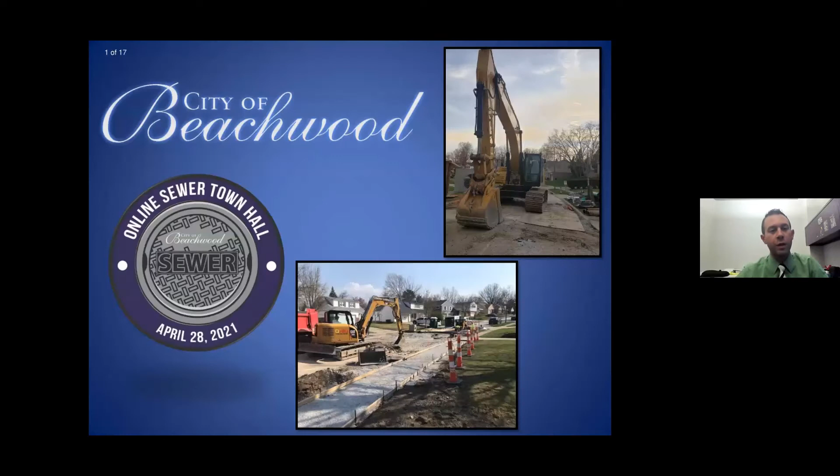As the mayor talked about, we're going to have an introduction into the sewer system and what the city, the county, and the sewer district has done, and talk about what the future is going to hold. So here we actually have some pictures from our recent project that was completed on Glen Hill. There's a storm sewer project, which we'll talk about here in a little bit.

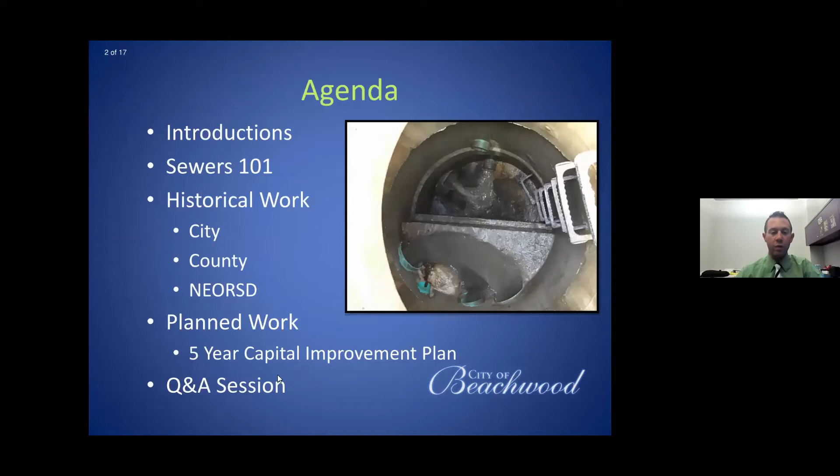Here's the agenda for tonight. We went over some of the introductions, Sewers 101, the historical work that the city, the county, and the sewer district has done, and then the 5-year capital improvement plan. And then, like you said, we'll have a question and answer session.

So Sewers 101, I want to talk about the responsibilities of the sewer system. On the back of the sidewalk is what's known as the right-of-way line or the property line. From the back of the sidewalk to the street is public infrastructure, and from the back of the sidewalk to the house is the private side. So there are storm sewers and sanitary sewers that the city maintains. The catch basins will go to the storm sewer, and any of the rainwater from your gutters, downspouts, and foundation drains go through your storm lateral and tie into the public storm sewer.

On the sanitary side, you have wastewater from your bathtubs, toilets, sinks, that will go through the sanitary lateral into the public sanitary sewer system. There are test tees that are located within the yard, which are used for cleaning operations and also televising your laterals.

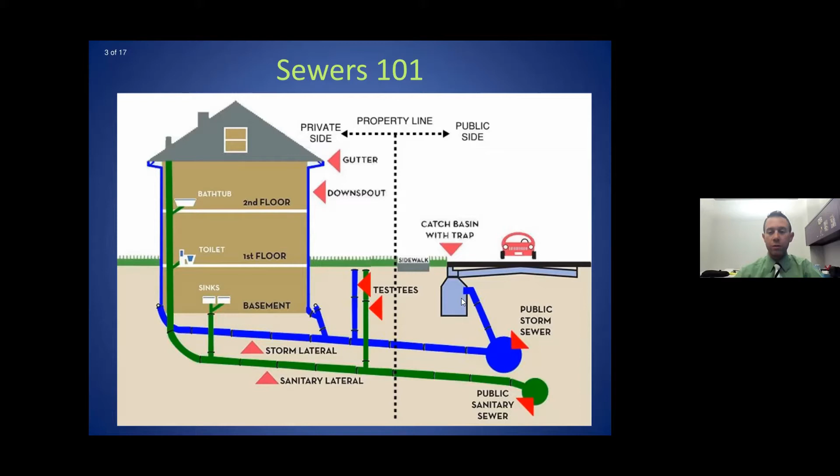What happens for flooding issues is that in a properly connected system, you can see that the roof, the foundation drain, and the catch basin are all connected to the storm sewer, and then you have the sanitary lateral connected to the sanitary system. When you have inflow and infiltration, otherwise known as I&I, you have cross-connected foundation drains, you have uncapped cleanouts, so surface water can get into those test tee cleanouts. You could have broken sewer laterals. You could have root intrusion from trees that get into the joints.

You could have storm cross connections if a catch basin is improperly connected to the sanitary sewer instead of the storm sewer. You could have cracks in the manholes, cracks in the mainline pipe as well. When this happens, and there's an influx of stormwater that gets into the sanitary system, that's what causes the basement flooding. And specifically on the private side, a lot of testing is being done to show where the downspouts are illicitly connected to the sanitary lateral, or if there are issues with the laterals that show there's broken connections.

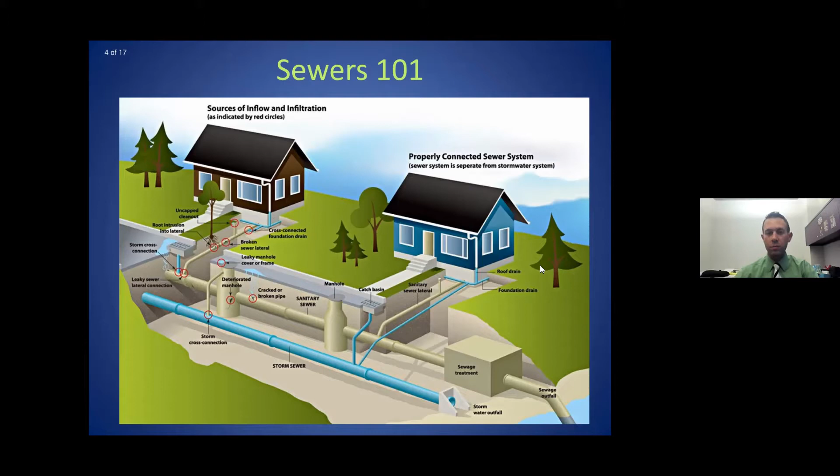As you can see here with the sewer system, the elevation of the house and the basement make a major factor into how the basement can flood and what level of rain event is needed for the flooding to happen. You have a house that sits much higher than an adjacent house on a hilly road. Then when this sewer backs up, there's a much better chance that the sewage could go back up into the lateral into this house instead of this house.

In this case, backflow preventers are installed. They're installed right behind the clean out, and it has a flapper gate right here that essentially acts so that water can only go one way towards the street, so that when it does back up, the flapper gate closes and it prevents flooding of the basement.

So the Cuyahoga County Department of Public Works, they've installed 38 of these throughout different residences in the city of Beachwood over the last 5 years. But the city actually started their own contract last year and installed 49 of them. And Mr. Chris Arietta is going to talk a little bit more about backflow preventers.

Thank you, David. So I just wanted to take a moment before Dave continues on here on the presentation and just give a little more information about our backflow program. For the past several years, Beachwood has worked closely with the County Public Works Department to install backflow preventers in homes where multiple backups have occurred. And these have occurred where we've had a storm surcharge in our mains.

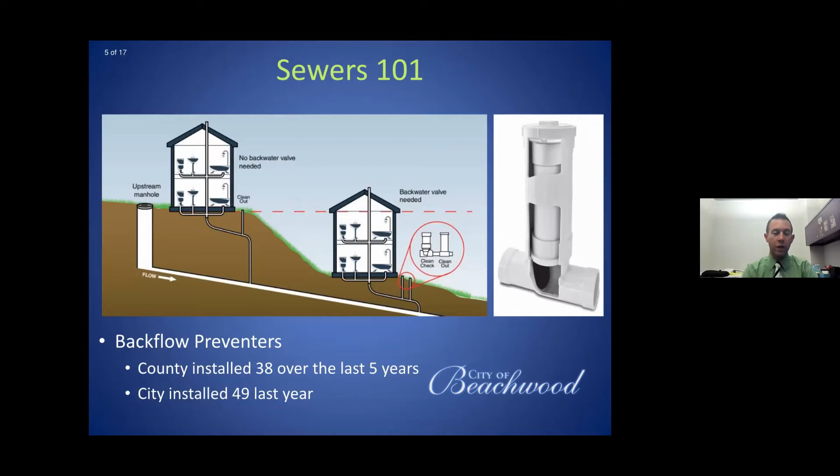And as the mayor talked about in his introduction, there was an increase in high intensity rain events. So in March of 2020, actually March 29th, we had what's known as a 5-year event. So it rained almost 1.5 inches in 1 hour. On July 11th, there was a 10-year event. So it's 2.79 inches over 6 hours. On August 3rd, we had a 2-year event, which is 1.33 inches in 1 hour.

And on Labor Day, the famous Labor Day event, it was actually almost a 25-year event. It rained 3.78 inches in 6 hours. That means that the frequency of that type of event should only happen once every that many years. So if it's a 25-year event, the probability of it happening based on all of the historical rainfall data, it should only be one every 25 years, one every 10 years, one every 50 years.

Beachwood, in 2020, had 58.75 total inches of rain. The Northeast Ohio Regional Sewer District has, I believe, 28 rain gauges in their entire network, and Beachwood's rain gauge was the second highest. So this is what a rain gauge looks like here. It's called the tipping bucket. So water comes in the top, and there's a little apparatus that once it fills up, it kind of tips over and it counts as a click. Each click is so many inches, and then it empties out the bottom.

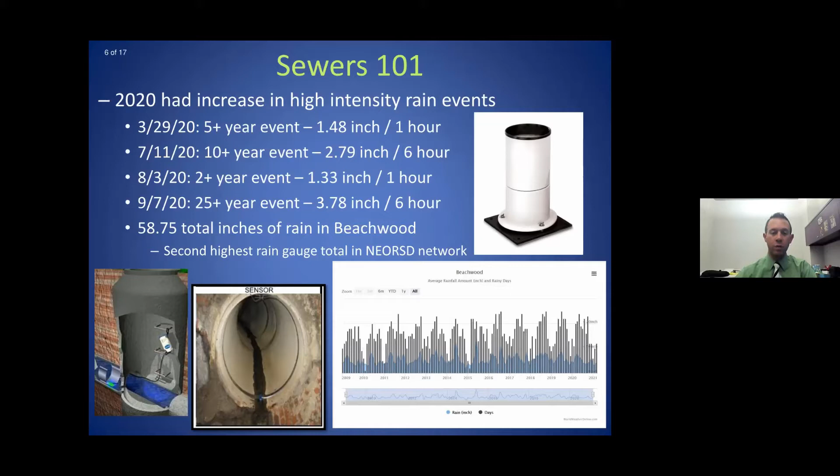It acts essentially based on the pressure that is pushed onto the sensor; it will tell you what the level of the water is in the pipe. So we use that to figure out where the problem areas are, and then also how to design in the future, what those improvements need to be.

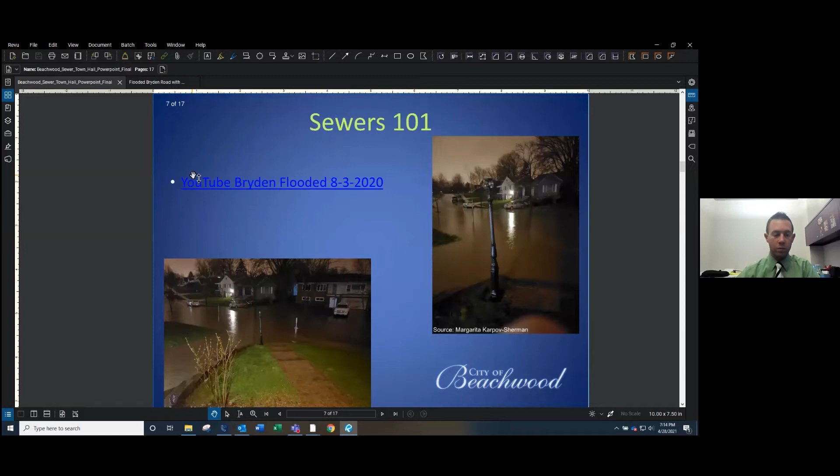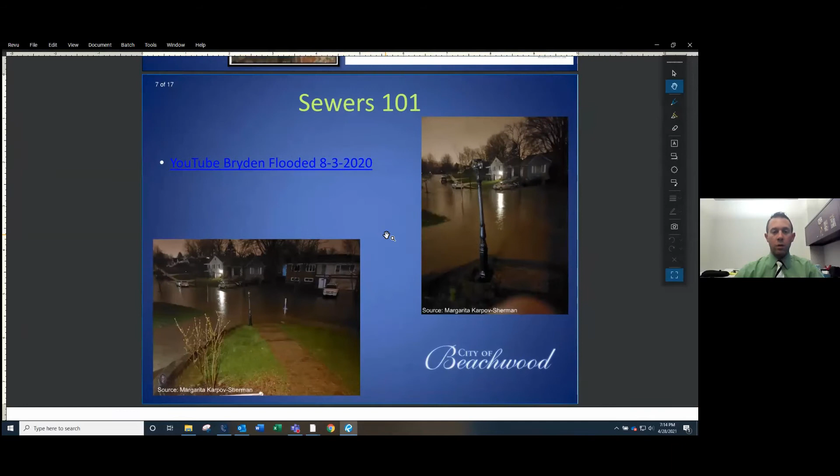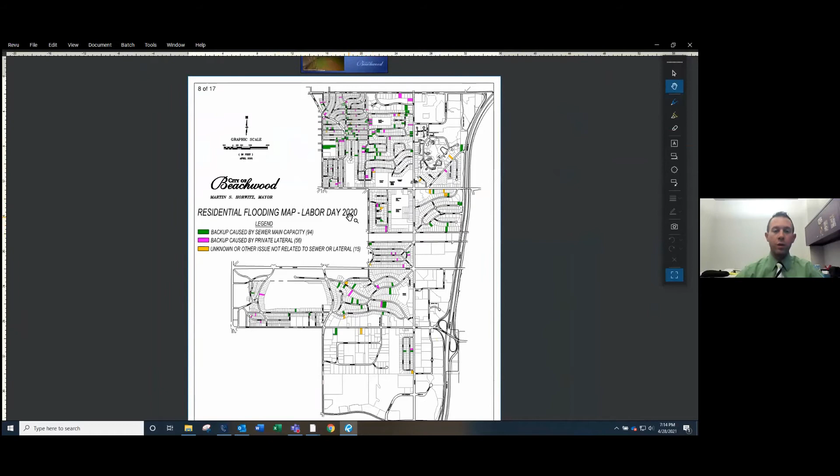So this is a map from Labor Day. All of these little squares or rectangles are parcels. They're the different properties. And so the city received 165 service calls from different residents. After they investigated it, the city and the county would go out to the residences, they TV the lateral, they TV the main, and they find what the problem was.

So in 94 of those cases, it was found that there was nothing wrong with the private homeowner's lateral, and it was more on the sewer main side in the street. There were 56 properties where they televised the lateral and the lateral was broken. The lateral had grease deposits, it had roots, other issues with that. And then there's 15 others not related to the sewer. So if your basement had bad waterproofing and it was leaking through the walls, that's not necessarily a sewer issue, but they still called the city just to talk about it.

So what this means is that there is an excess amount of stormwater, as we talked about before, those illicit connections, a lot of stormwater getting in from downspout connections into the sanitary lateral. And so it's not necessarily that the sanitary sewer capacity is undersized. It's just undersized for the amount of flow that's getting to it that shouldn't be getting to it. If you think about it, there's a standard gallons per day of what each person uses, and that's how the sewers are designed. So when you have that standard plus a 25-year rain event, you're going to have basement backups.

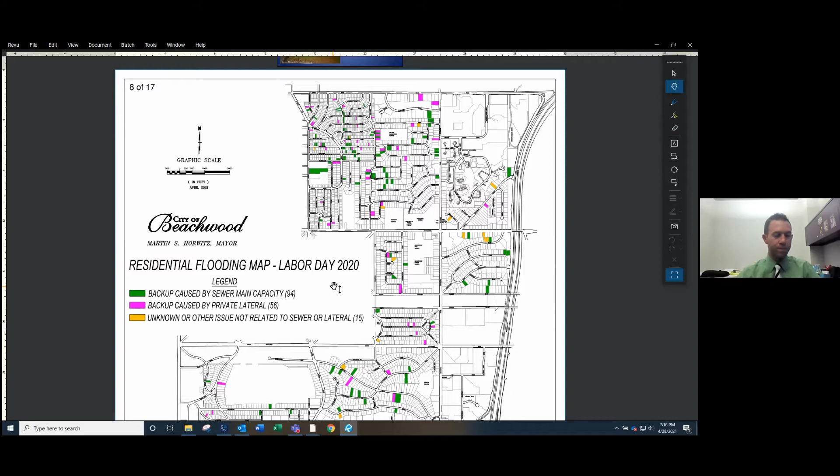So what's been going on work-wise? The Cuyahoga County Department of Public Works does work for the city of Beachwood, and there's tax dollars that go to them that they're using in the city. And in 2020, they had over 170,000 feet of sewer cleaning. That's both sanitary and storm sewers. It's about a 50-50 split.

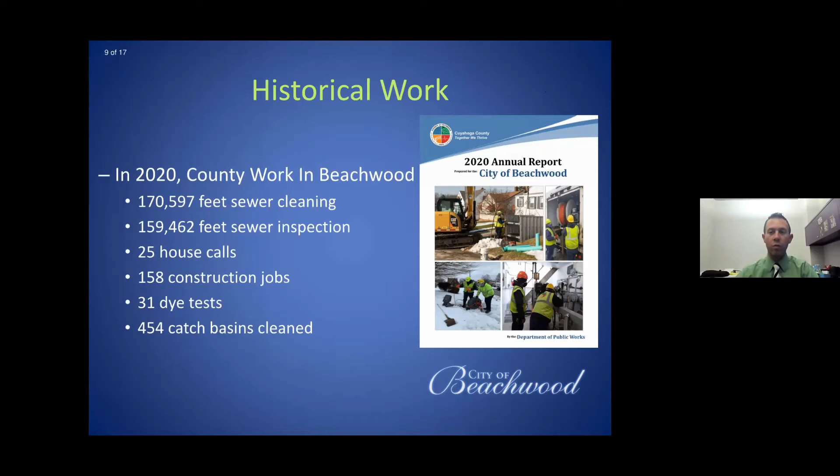They had 159,000 feet of sewer inspection. They did 25 house calls, 158 construction jobs, 31 dye tests, and 454 catch basins that were cleaned. This was above average compared to the previous 5 years when you look at the annual reports, which are available on the county's website.

So of those dollars that were spent, the maintenance of the sewer system was just over $844,000. Pump station operation and maintenance, $31,000. Engineering and/or inspection cost was $56,000, and capital expenses for different repairs that were being done were just over $84,000. For just over $1 million that the county spent of the Beachwood money from that tax base.

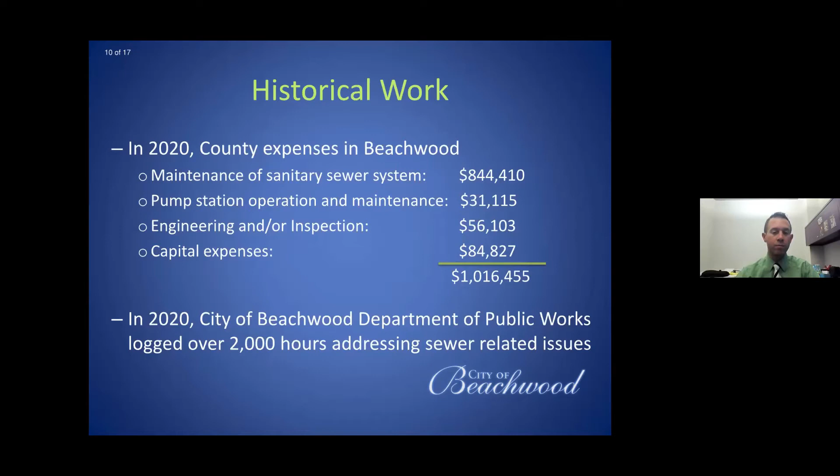Also in 2020, the city of Beachwood Department of Public Works logged over 2,000 hours addressing those sewer related issues. So that would be going and looking at those flooding complaints, whether it's street flooding or basement flooding. There were issues, I want to say it was in May, where they actually had to shut the Green Bryden intersection down because of the flooding. So stuff like that, that's regular and overtime hours spent on investigating those incidents.

So what the city and the county have done, they have done sewer rehabilitation. So that would include lining the existing sewers and also replacing the existing sewers on all of these streets. So a liner is essentially a balloon or a bag that gets inserted into the existing sewer, and it acts as a pipe within a pipe. That way you don't have to dig up the road.

There are certain instances where you can do lining, but there are certain structural defects. If you have large sags in the pipe, the liner won't affect it. Or if the pipe is collapsed, then the liner can't get through and replacement is necessary.

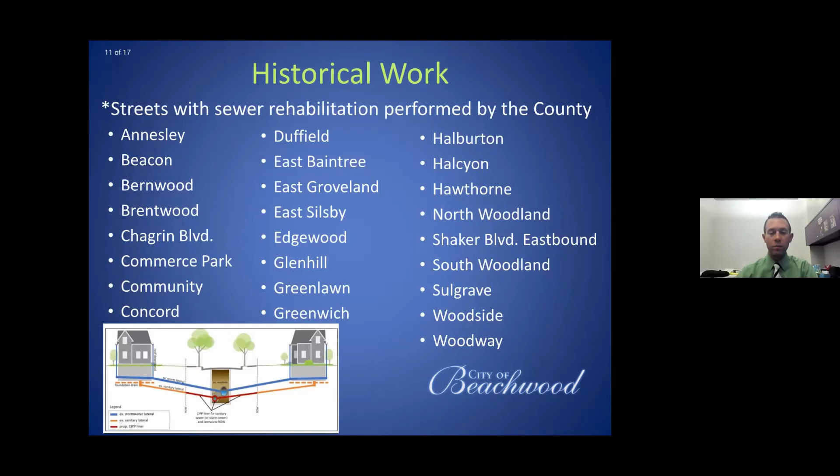So another big project that was done was actually by the Northeast Ohio Regional Sewer District, the Heights Hilltop Interceptor Local Sewer System Evaluation Study, which is the HHI-LSSES. So how the sewer district works is they have 3 treatment plants in the Northeast Ohio area, and there's 30-something communities that are tributary to those 3. Beachwood is primarily tributary to the Easterly plant, and this area is called the Heights Hilltop area.

There's different interceptor areas that are being studied. So the Heights Hilltop interceptor area was studied mainly in the 2016-2017 timeframe, where they did flow monitoring, dye testing, smoke testing, camera work. They talked to all the different communities, and we talked and gathered the known problem areas to try to build a holistic model for these communities. But it was also planning level, because they obviously could not investigate every single pipe throughout their network.

They're just trying to eliminate some of that inflow and infiltration into the system, because ultimately, whether it's flooding at the house or it goes to an overflow point or getting to the plant, it's less. They don't want to be treating rainwater. The storm sewers, you want them to outlet to the river or the lake. There's no sense in treating them at the treatment plant.

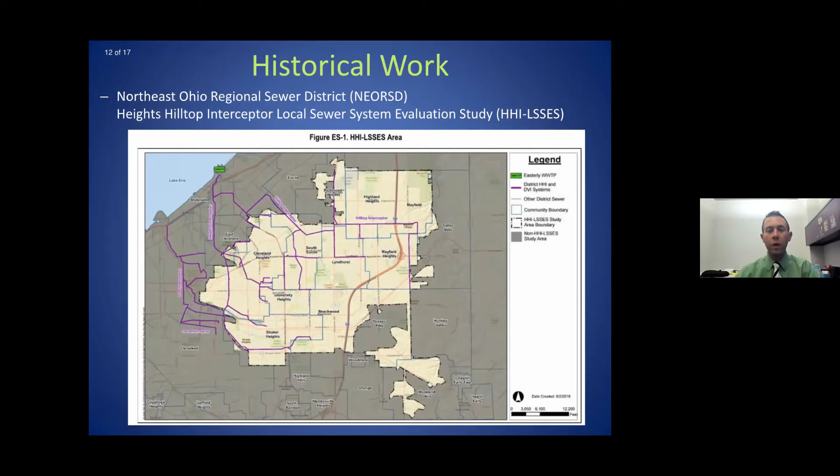So out of this study, there were potential solutions that were created for some of those high priority areas. And those solutions were prioritized into 3 tiers. So the first tier is known problems. So it's those community reported problems, basement backups, abbreviated BBU on there. So known basement backups, and known SSOs, which are sanitary sewer overflows, that are active during that 5-year rain event.

A tier 2 is areas of excessive inflow and infiltration. So the separate over under common trench systems, sewage, stormwater, cross flow pollution, and difficult operation and maintenance areas. So when they did the smoke and dye testing, did they find that there was a lot of cross connect between the sanitary and the storm sewers?

And then projected problems. So model predicted basement backups and flooded manholes that would have been based on that flow metering that was done. And then any of that sewage, stormwater, cross flow pollution as well, and aging infrastructure. Is the sewer system 30 years old or is it 100 years old? In some of the areas, it can be more than 100 years old.

So primarily the results of this are to address the sanitary sewer system side. They do not address the storm sewer side, but inherently the storm sewers will be somewhat addressed by getting the inflow and infiltration into the storm sewer network instead of the sanitary sewers.

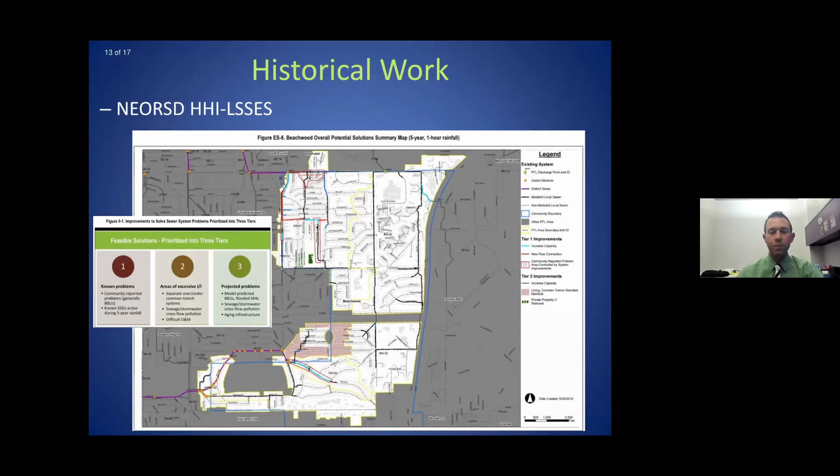So using that and some of the known projects that the city has been kind of thinking about, we were tasked with creating a 5-year capital improvement plan. And so this is the list of projects just starting out strong in 2021. The first one was the Glenhill Storm Sewer Project, which we had seen in the pictures from earlier. That actually did finish this month. They're doing some punch list items, but we designed it, and then the contractor came in and completed it pretty quickly. The low bid was just over 131,000.

Next, we have the Beachwood Boulevard Storm Sewer. That design is in progress, and that estimated construction cost is about 1.2 million. That's going to be essentially a relief sewer for that general area, which we'll get into when I show the overall map here in a little bit. The Community Union Phase 2 Storm Sewer, that's also in design, and that's an estimated construction cost of 1.15 million.

We have the Green Bryden Culvert Improvement. That design is also in progress, and that estimated construction cost is just under 1.3 million. And that project actually involves both the city of Beachwood and the city of Shaker, which I'll show on the map here in a little bit as well. And then the Timberlane Green Sanitary Relief Sewer, that design has not started, but flow metering for that will be getting started soon.

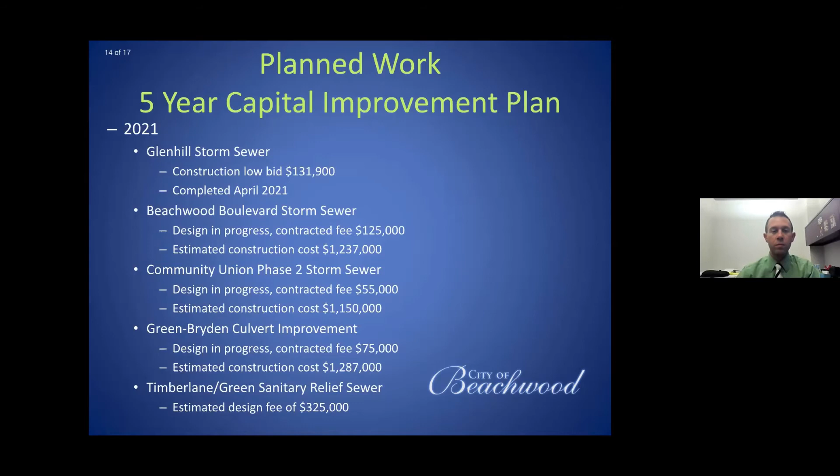In 2022, and potentially 2023, depending on additional funding from the sewer district that we're looking into, the Timberlane Green Sanitary Relief Sewer construction would start. And that cost is actually from the Northeast Ohio Regional Sewer District HHI study. There was a high level values put down kind of on a linear foot basis.

We know it's 1.25 miles. They just assign a certain value per foot, and that's how the construction cost was. So that could be variance plus or minus 30%, but we think it would be lower than that, on the lower 30% side. Then the Bryden Road Sanitary and Storm Sewer design, that's also slated to start next year.

That we cannot do until the Green Bryden culvert is complete, because the storm sewer connects to that culvert system. That estimated design fee is 567,000. And then in 2023, we'd have the construction of that Bryden Road Sanitary and Storm Sewer. This again is costs from that Northeast Ohio Regional Sewer District HHI study. And that's just over 5.6 million.

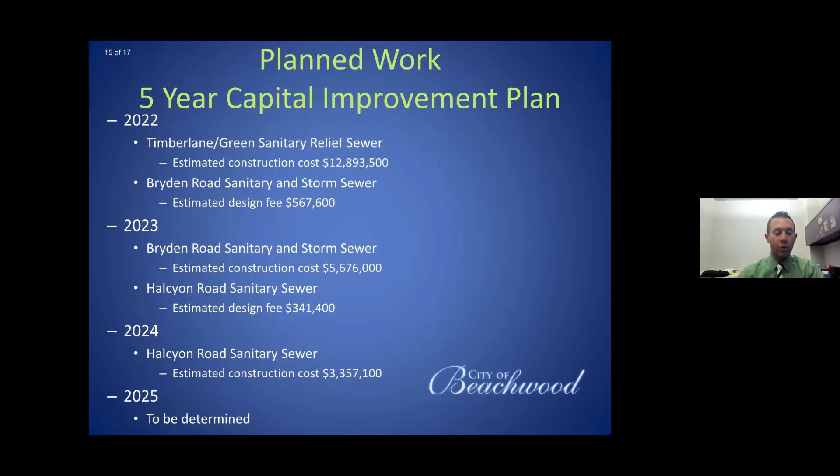And then there would be the Halcyon Road Sanitary Sewer design. There's a lot of backups in that street. And then in 2024, we would have the construction of the Halcyon Road Sanitary Sewer, if future modeling doesn't prove that we don't actually have to do this project. And then in 2025, it's to be determined. We don't have any other projects that are slated right now.

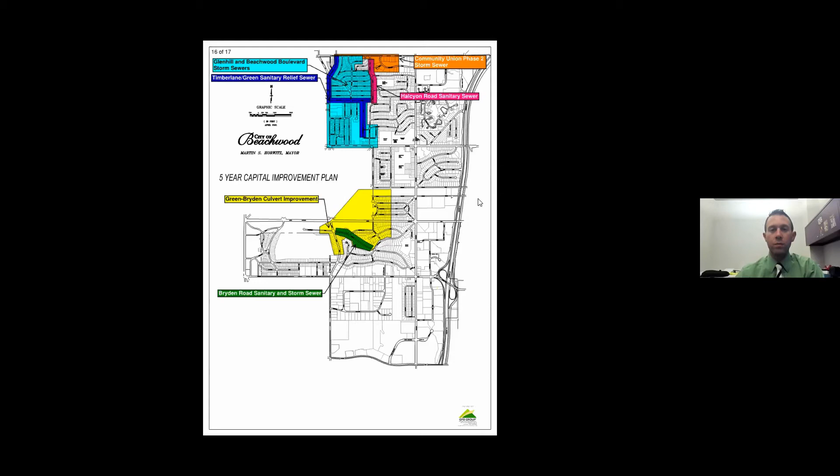Thanks, David, and thanks for a really concise presentation. At this point, we're going to take some questions and answers, and we'll try and have some answers. We'd like to try and go for about a half hour. We don't want to go much beyond 8 o'clock because we don't want to delay the president's speech.

But how we're going to do this is we have two ways of doing it. If you're a participant, which is everybody except the 3 or 4 of us, you can go to a button on the bottom of your screen and it says raise hand. If you don't want to actually give us your question and get into a discussion, you can go to the Q&A section of your screen on the bottom and just type in a question.

There is one comment already in the Q&A, and I just want to pass this over to Joe and David and see if you have any comments on this. It's not really a question. Donna Simmons writes, with climate change, you cannot assume that what was a 50-year event in the past will hold true in the future. She also writes, also the issue is not just the amount of rain, but the amount of impervious surface. So David or Joe, comments?